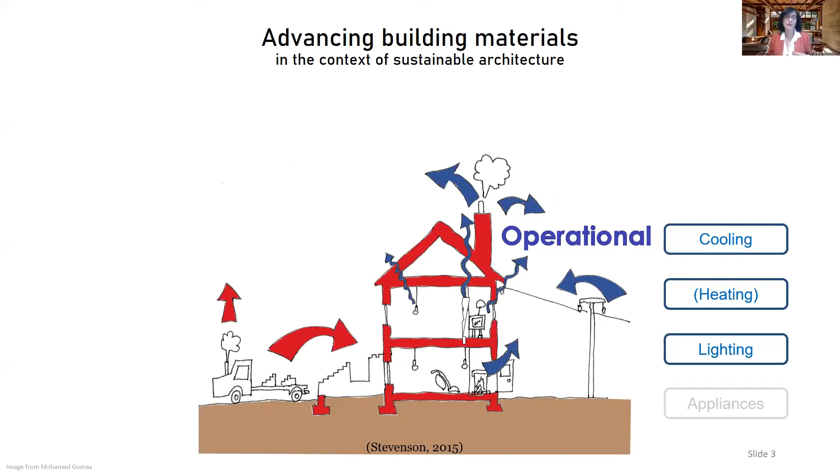However, we often forget that building materials also consume energy to make, construct, maintain, refurbish, or dispose of at the end of the building's lifetime. So this is something advancing building materials need to also consider—minimizing the operational energy at the same time as minimizing the embodied energy, in order to reduce environmental impact.

Now, the first part of my talk is about advanced building materials for building facades, in particular glass. Why glass or glazing? I think glass is like the face of most modern buildings—we love to use glass. Why? Because on one hand, the glass can protect us from the elements, from heat, from rain, and so on, but also allows us in the building to still enjoy the view outside.

First, glass has issues because it receives solar radiation from the outside, and some part of this solar radiation will be reflected, some will be immediately transmitted, and some will be absorbed—which then is either re-radiated to the inside or outside. The part radiated inside becomes long-wave radiation, meaning it changes property from short-wave to long-wave radiation, and it gets trapped in the building.

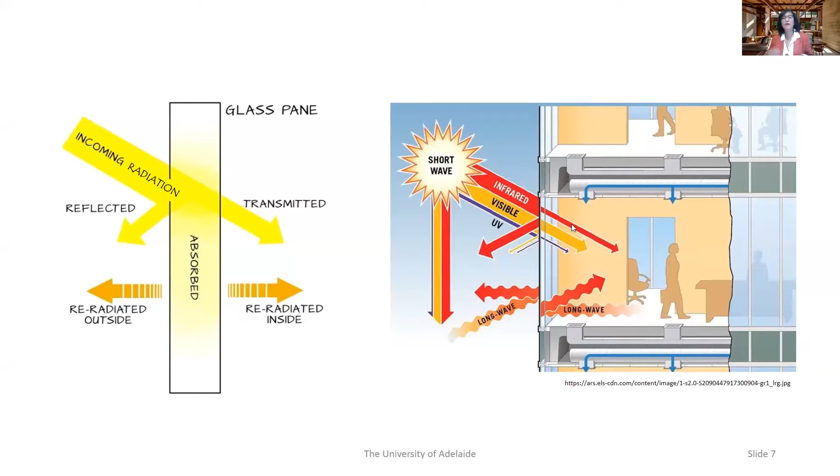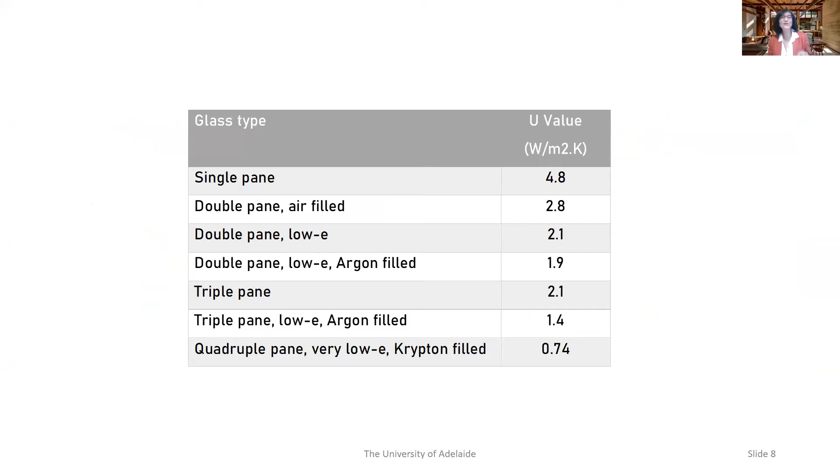So we could reduce the amount of heat coming into the building, and there are two properties we need to look at. One is called U value, or sometimes conductance—basically the rate of heat transferred through a material, in this case glass. Single pane clear glass could have a U value of about 4.8 watts per meter square degree Kelvin temperature difference between inside and outside. As you can see here, when you put in double glazing with argon-filled gas, or triple glazing and so on, the U value becomes less and less.

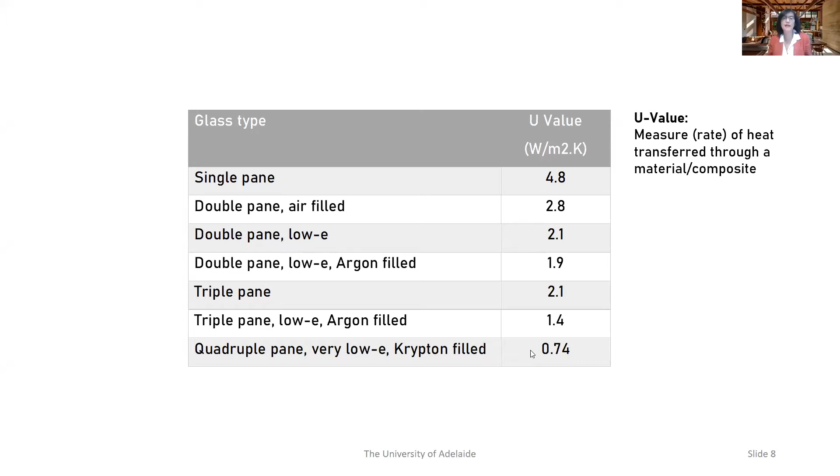The other property is what we call solar heat gain coefficient, which is basically the percentage of solar heat directly absorbed by or transmitted through glass. Again, the higher the solar heat gain coefficient, the more heat comes into the building; the lower it is, the less heat comes in. Now, the difference between the two is that this applies when you have direct solar radiation, whereas at nighttime, if the outside temperature is still higher than inside, the heat would still be conducted by the glass. So U value is conductance, and solar heat gain coefficient is the heat transmitted.

So what we want is minimizing the U value as much as possible, or as much as realistic, but also try to minimize solar heat gain coefficient.

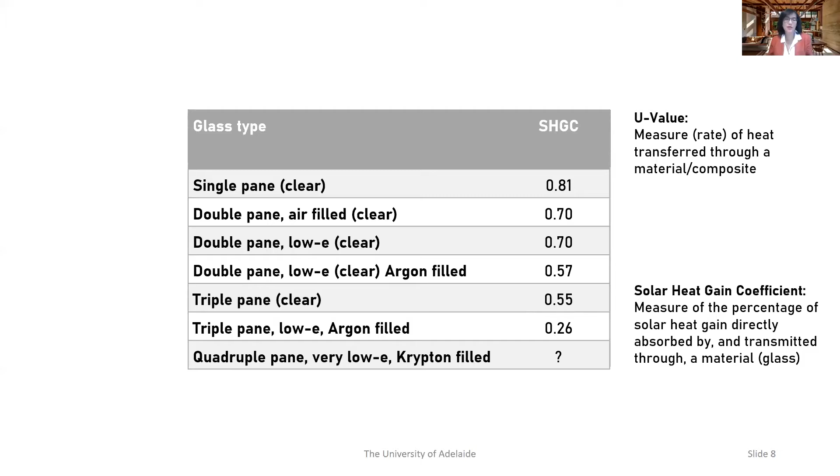Minimizing solar heat gain coefficient can also be done by just putting external shading. Whether it's a small house, we could have shading or trees in front of the building, or in a big building, you could have external shading, which in a way could also reflect the architecture of the building.

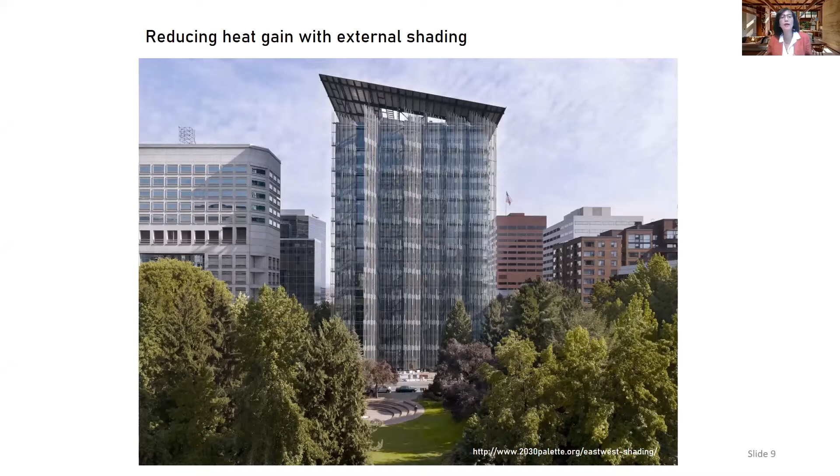This particular one has quite intricate external shading devices where it blocks the western sun, which is a bit warmer than the other side of the building. The northern and southern part of the building has some overhang and fins like this. So what's wrong with putting this onto the building?

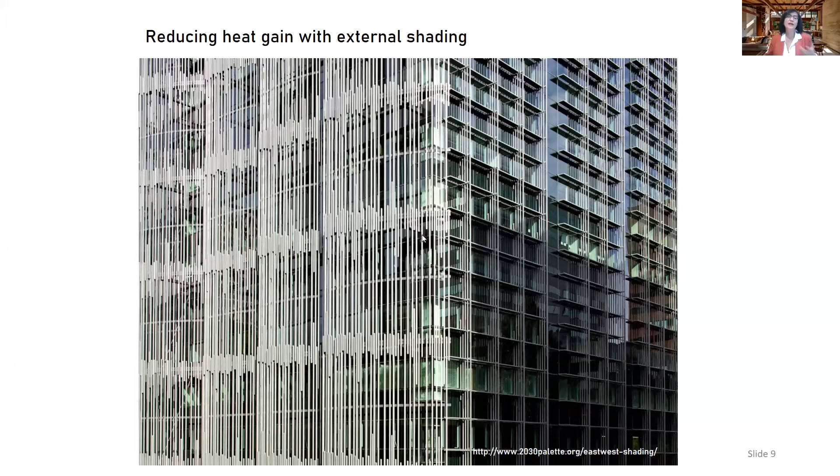There's nothing wrong, except that in a bigger building it could be quite difficult to maintain or keep clean. You can imagine if birds fly into it and leave droppings, these just get dirty very easily, and somebody has to clean it. You can imagine how difficult that is.

Another strategy is using what we call reflective glazing, and it can be quite efficient or effective to minimize the heat gain to the glass because it can reflect up to 90% of solar radiation.

I remember back in the early 80s, one of the first buildings in Jakarta that had reflective glazing, I think it was the Lippo building in Kuningan. I remember when I went to that building, I used to stand in front of it and I thought, wow, that's a mirror. So I could use it to brush my hair before I had a meeting inside the building.

Anyway, the problem with reflective glazing is that while it reduces the heat gain, it also reduces the solar radiation in terms of light, the visible transmission. As a result, the building can get darker inside and you have to turn on your electric lighting. So whilst you reduce the energy for cooling, now you use a lot of energy for electric lighting. So I don't think reflective glazing is quite smart.

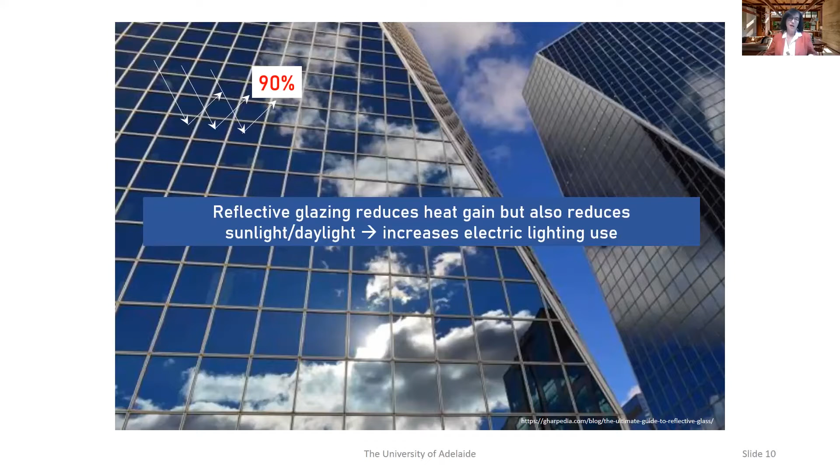In the past, I suppose at the end of the 20th century, there has been some new development called smart glazing, sometimes also called chromogenic glass. So what is it? This type of glass basically can switch the thermal and optical properties of the glass depending on the outside condition.

It's a glass that can switch its property using some sort of artificial device. It could be some sort of gas put between the panes of glass, or you could induce it with electricity using what we call the electrochromic technique. Basically, it then switches the thermal property of the glass, so it becomes darker when the sun hits it, and then it starts to behave almost like reflective glazing, reflecting the heat to the outside. Then when there's less heat from the outside, it starts to clear up again, allowing the sun to come into the building.

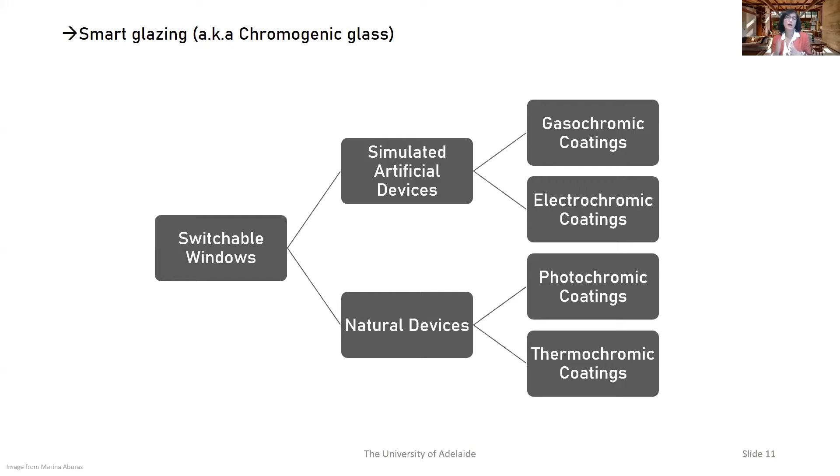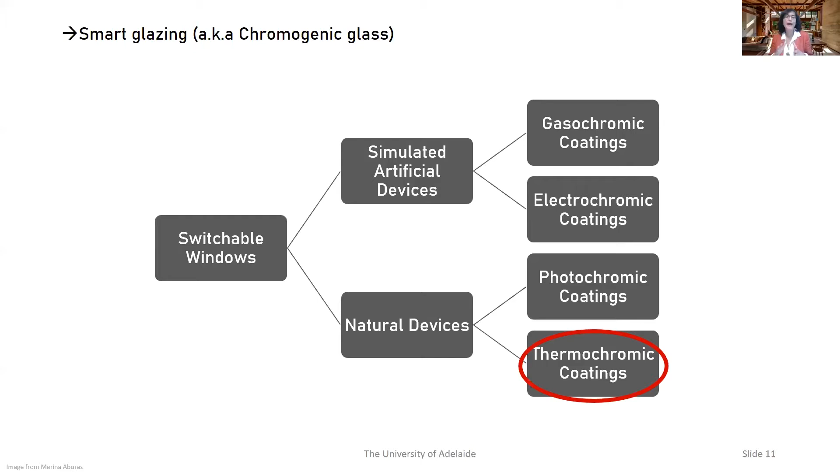The other one is the natural device - the kind of glazing that does something similar but without these external devices. One is called photochromic coating, which reacts based on the amount of light that goes to the glass. The second one is called thermochromic coating, which is what I'm going to talk about here. Basically, if there is a higher temperature outside, the glass becomes darker again, reducing the amount of heat that goes into the building. Then when it becomes cooler, it becomes lighter again, clearing up the coating's color and allowing the sun to come into the building.

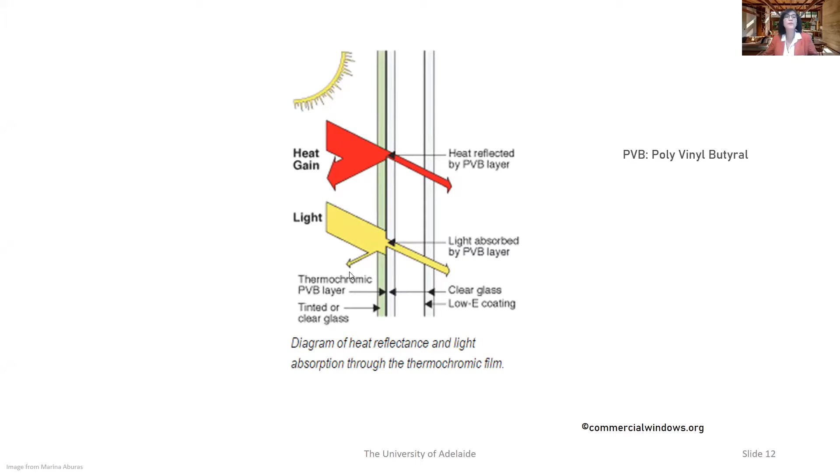So in a nutshell, the way it works is something like this. The sun would hit this glass, and with this PVB, or polyvinyl butyral, coating, it would reduce the amount of heat coming into the building while still allowing some light through, with only a little part reflected out. This is how it looks in the most conventional thermochromic coating, at what we call the 'on' stage, when it changes its property to become darker and reflects the radiation outward.

At the on stage, the problem with conventional thermochromic glazing is that it still reflects too much solar radiation, which also means it doesn't allow visible solar radiation coming through the glass, so the inside might still be darker. So thermochromic glazing now is the new reflective glass, although it doesn't happen all the time, but it seems to be the case.

Before I go to the actual work, I apologize that this probably seemed too technical for many architects, but it's a very important concept.

Basically, when the sun doesn't hit the glass, or when the outside is cooler than the inside, the glass is in what we call the off stage, or the cold stage, and it's in the semiconducting mode. Then when the sun hits it and it starts to switch the property, it becomes metallic, and that's where it reduces the sun coming into the building.

The change of temperature often in the conventional one happens at quite a high temperature. Actually, the transition temperature is about 68 degrees Celsius.

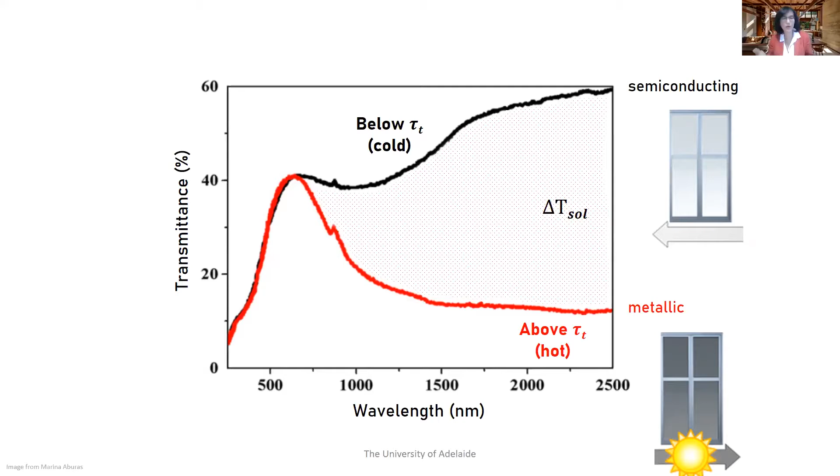If you can imagine, I'm sure some of you are wearing sunglasses or glasses that when you're outside, the glass becomes darker, and then when you go inside, it clears up this darkness. It's a similar concept, although that's more what we call photochromic glass, whereas this is the thermochromic glass. So it's not based on light, it's based on the heat received on the surface.

So this is the work by one of our new PhD graduates. She's now a doctorate, Marina Aburas. She did her PhD with us, also in conjunction with the Department of Architecture at University of Nottingham in the UK. So she received 2 degrees in this.

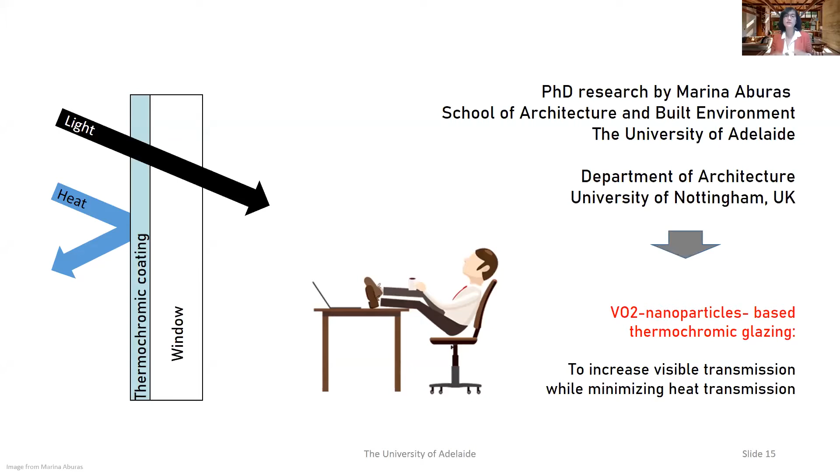What she developed basically is advancing this thermochromic glazing using vanadium dioxide nanoparticles. You probably heard nanoparticles - it's very minute, very small, 1 to the billionth of a meter. So it's a very minute particle that she applied on the coating for this thermochromic glazing, with the idea to increase the visible transmission of solar radiation while still minimizing the heat transmission.

She also tried to reduce that temperature from a high 68 degrees to 36 to 40 degrees. What it means is that the glass doesn't have to be so hot that it would change its property. It can change at 40 degrees, which means the glass doesn't get too hot, so there's less heat being generated or transmitted to the inside. So it tries to cool the building much quicker than conventional thermochromic glazing.

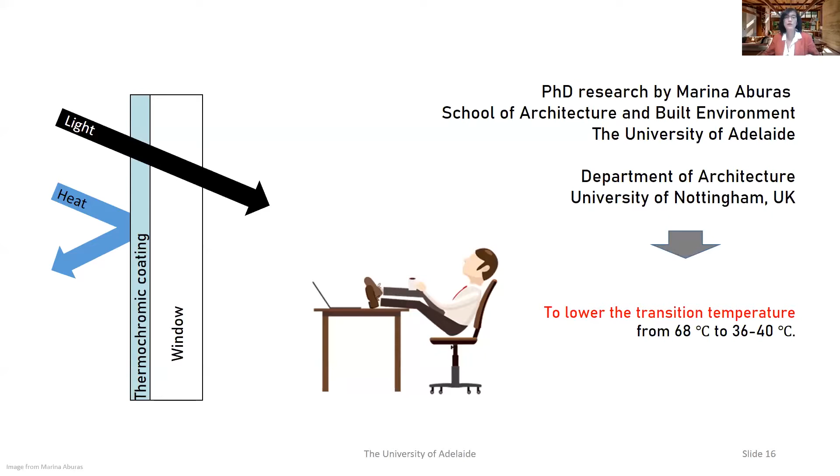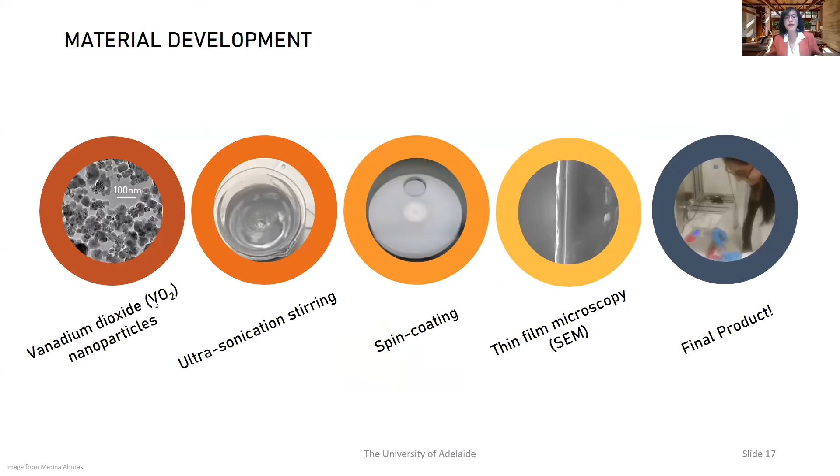Now, this is work of many years, 2 to 3 years, about 2.5 years. I'm not going to show you in detail, but basically she developed these vanadium dioxide nanoparticles using ultrasonication stirring, then spin coated, applying thin film microscopy, so it becomes a thin film, and then the final product. For the final product, she also applied several layers, from 80 nanometers to 800 nanometers - the more layers, of course, the darker, the less layer the less.

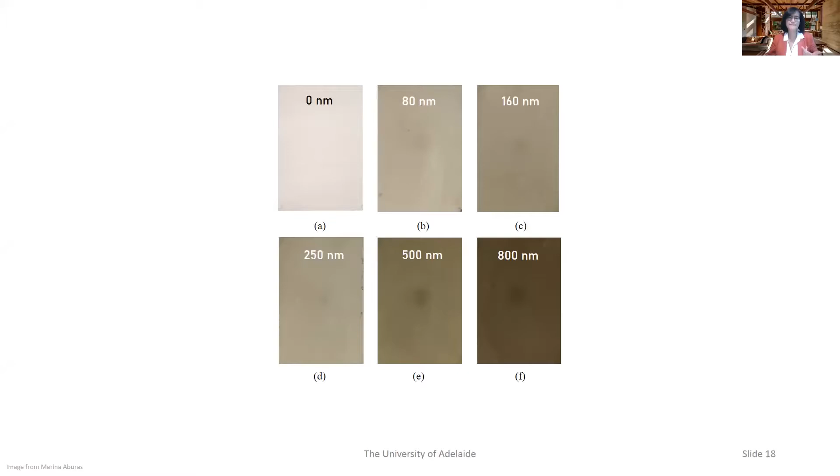Now, this is the exciting thing. If you remember the graph I showed you before, the conventional thermochromic glazing, when it's at the on stage, have a look at this - the percentage of solar radiation that comes into the building is only about 17% at the on stage, which means you reduce so much light into the building.

This is what she was able to develop: with an 80 nanometer glass at the off stage, let's say you got about 80% solar transmission. When it's at the on stage, it is reduced by 10%. Let me jump to the 500 nanometer - it reduces to 60% transmission, which is still a lot of light. And even the thickest one, she could only reduce the solar radiation to 30%. So you still get light coming into the building.

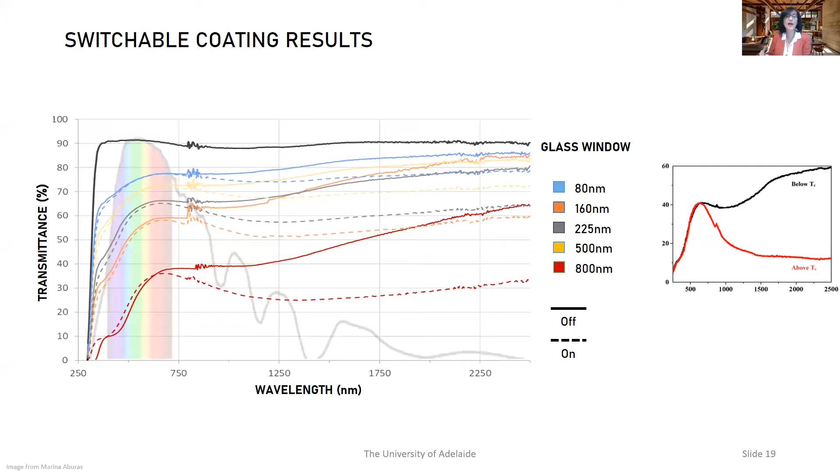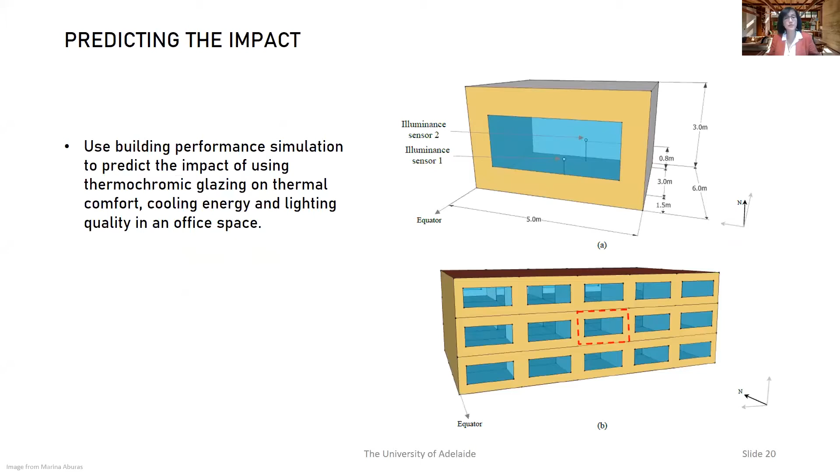So what she then did is apply this glazing to a hypothetical building, an office building, kind of typical office building, and use building performance simulation to see the impact of this glazing. I'm just going to ask you to focus on the hot climate, which is the building in Cairo, hypothetically in Cairo. Of course, Cairo is not exactly the same as Jakarta, but it is hot - hot and dry, not hot and humid.

But have a look at the impact of applying that coating. If I just jump again to the 500 nanometer, basically you could reduce the energy by 25%.

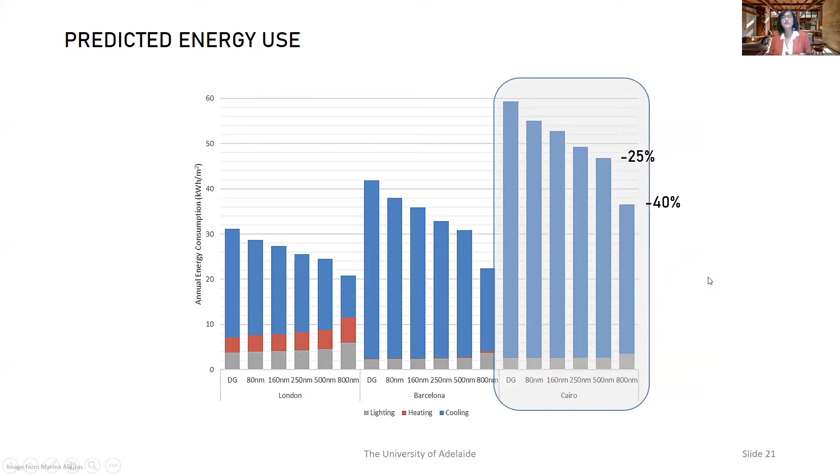And if you use the thickest one, you could reduce by 40%, so nearly half of the energy used for cooling can be minimized. The lighting energy does increase slightly because the building gets slightly darker than before, but the increase in lighting energy is almost negligible compared to the significant decrease in cooling energy. So it's possible to achieve this using this new nanoparticle thermochromic technology.

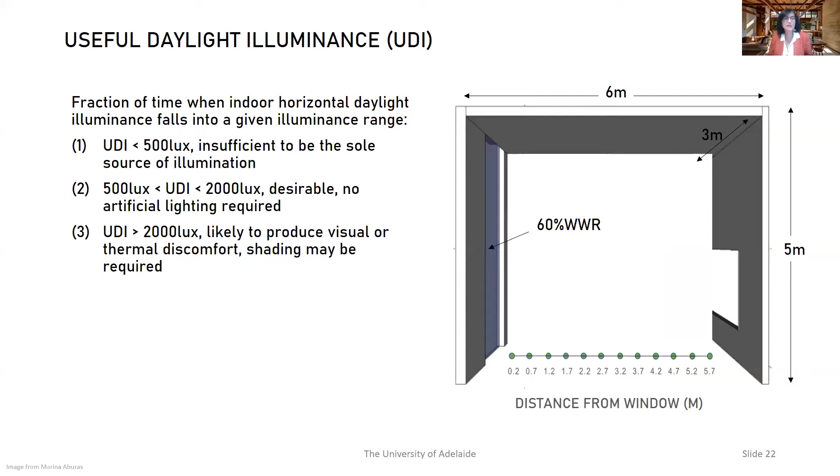In addition, she also looked at how useful the daylight is that gets into the building. The target is, if possible, to achieve between 500 lux to 2000 lux of what we call useful daylight illuminance, although 500 lux itself is still quite high. In most green buildings now, 300 lux is considered sufficient. And this is what she found.

If you just look at double glazed windows, you got a lot of daylight, obviously, but at the same time you got excessive amount of daylight, even up to 5 meters from the window. So this is the distance from the window.

With the thermochromic glazing, even with the thickest one, you still have quite a lot of useful daylight coming into the building. Yes, there's a lot more that is less than 500 lux, but as I mentioned, in new green buildings, we don't need to have this 500 lux. 300 lux is already sufficient.

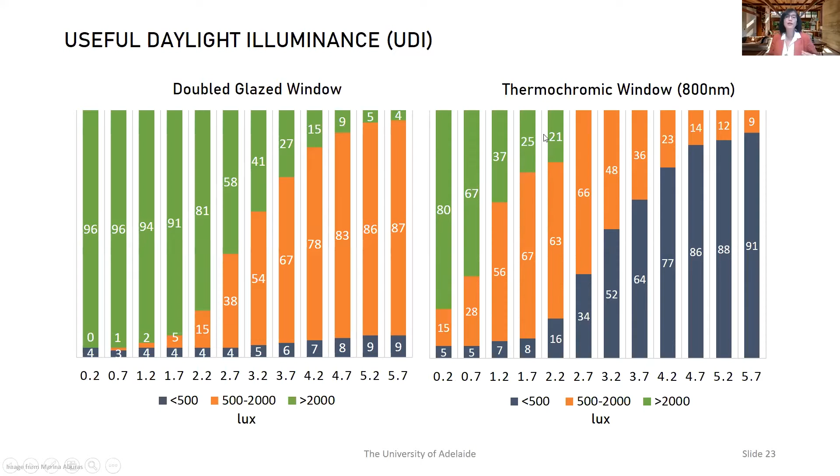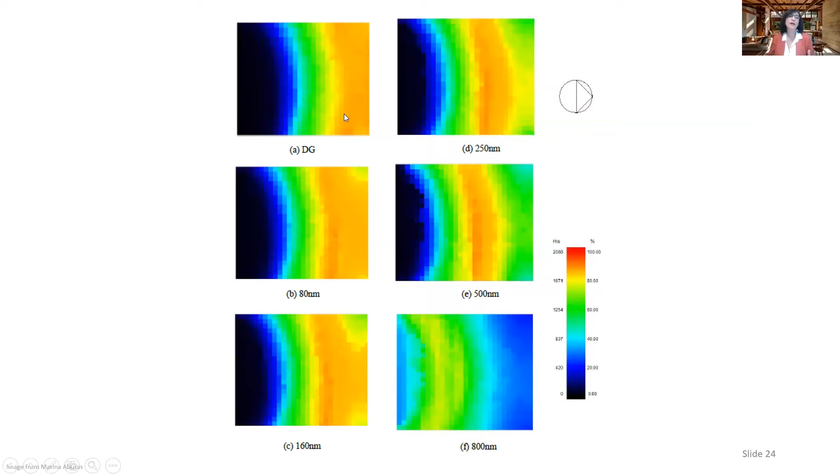And with it, it also reduces the possibility of people experiencing glare, because you don't have excessive amount of light. So the daylight is a bit more evenly distributed when you use the thermochromic glazing, compared to double glazing, where you got really bright area in the front and then quite dark at the back.

So where's it going to be in terms of this invention? Of course, she only just finished the PhD, so hopefully a manufacturer might pick up on this idea and could start manufacturing at a larger scale. So that's the first part.

And how do I go with time? Am I still okay? Okay.

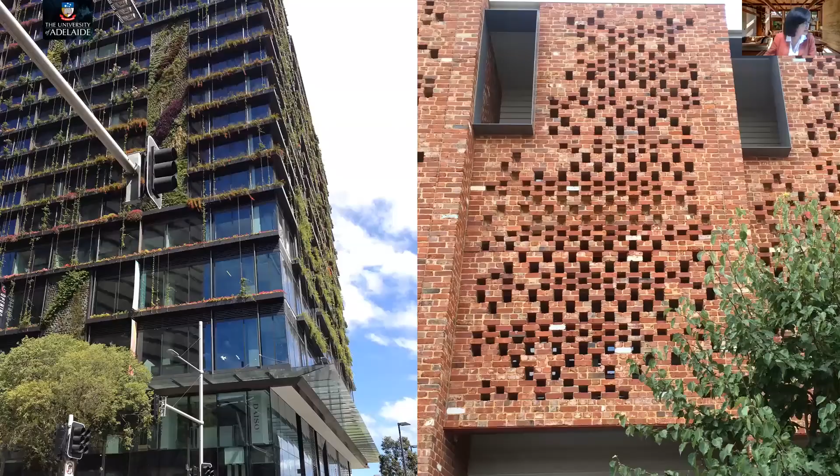So the second part is quite the opposite. Whilst the first one is looking at the glazing, the second part of the presentation is looking at the wall itself, and it's quite the opposite in terms of the materials. This one is looking at, well, I shouldn't say low cost, but it's basically using vernacular material.

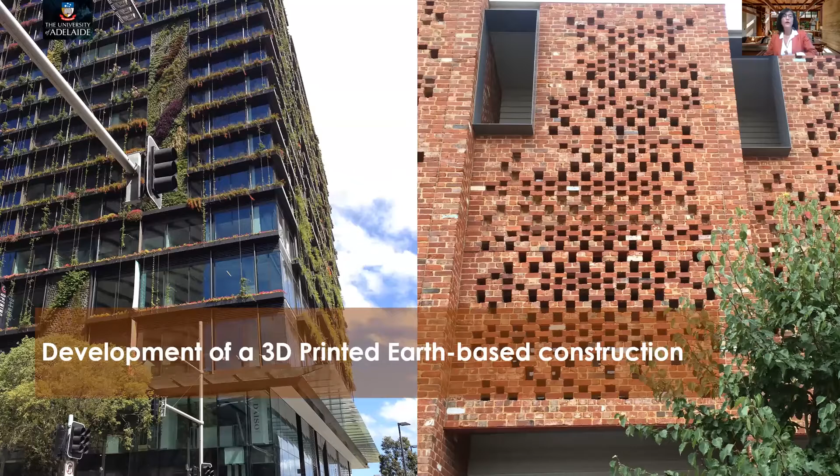However, with a high-tech way of constructing it. So it is about development of earth-based construction using 3D printing technology.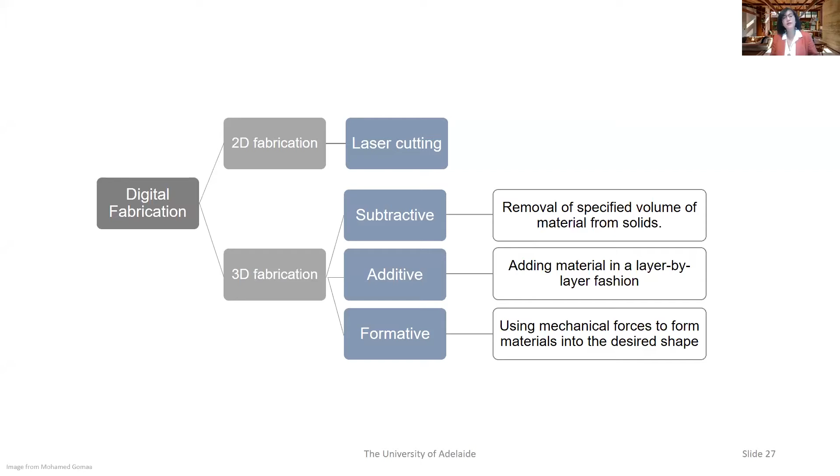Now, I'm sure many of you, if not most of you, are quite familiar with what we call digital fabrication. So digital fabrication basically could be a 2D fabrication, just using laser cut, and I'm sure many of you build physical models now using laser cutters. Or you could use 3D fabrication. With 3D fabrication, you either use it as a subtractive or removal method, so let's say you got a block of material and then you start cutting it and you make the model.

Or you could have the additive method, where you add layer by layer of materials, again to make a model. Or with the formative method, you form any kind of shape you want. Whereas on top of this is the 2D laser cutting.

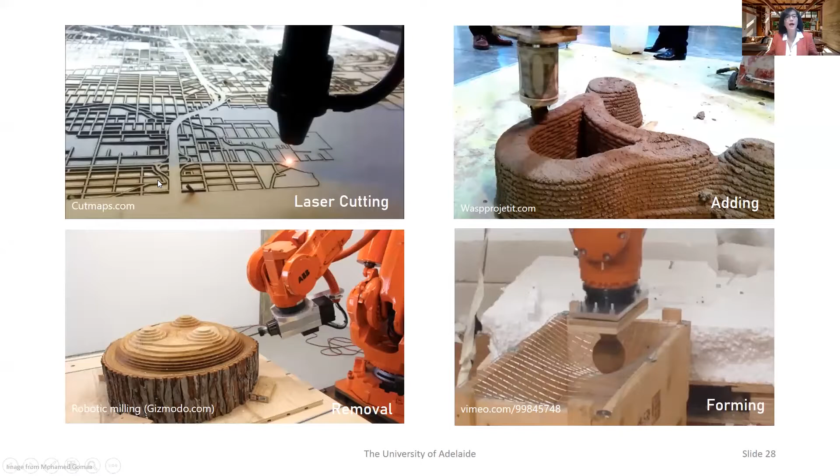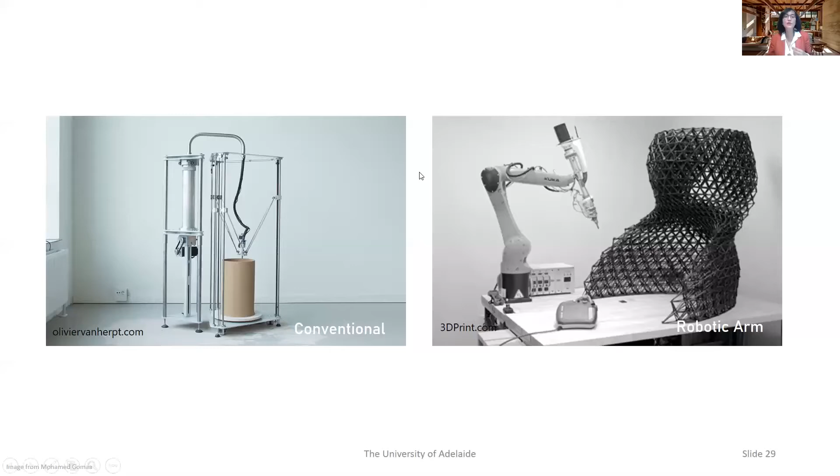Also, a lot of 3D printers, or the conventional one, has 2 axes, so X and Y, so you only print in the 2D XY direction, whereas a robotic printer you can print with the 3-dimensional or 3-axial direction, so X, Y, and Z basically. What my PhD candidate has been doing is basically using this robotic arm printing.

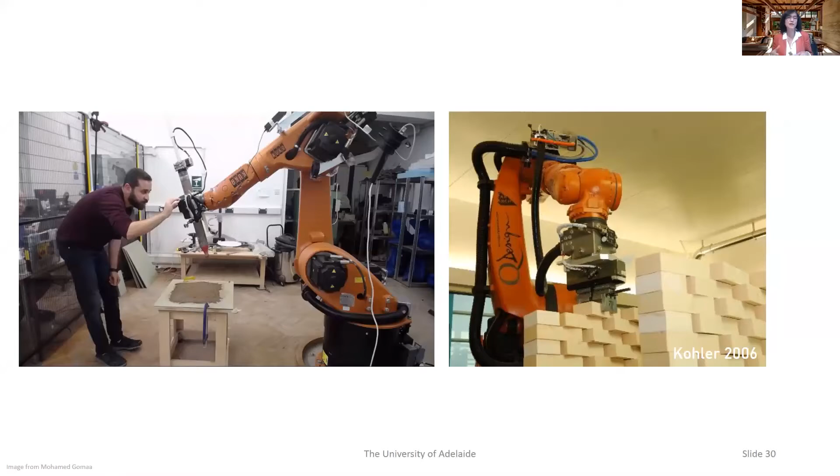But not just to build a model, but to build the actual building using this digital fabrication technology. So it's basically building a wall, a real wall, using a 3D printer. So this is what I'm going to talk about.

And why do we use 3D printing? When he actually brought this idea to me, I was quite skeptical. And I said, what's wrong with building with people? And why can't we just build with a crane or with normal construction techniques?

Well, he was able to convince me, basically, that when you use 3D printing or a 3D printer to build a building, you potentially reduce the construction waste. Because, as you know, those of you who do 3D modeling using a printer, you have to program the printer, which means you can program it so it will only use material as you need. There's not going to be much waste.

Whereas if you build with the conventional way, let's just say, because building material comes at certain sizes—let's say a timber beam is 4 meters long, and we want to build something which is 3.5 meters long, what do we do? We have to cut it, right?

Now, what happened with the 0.5 meter leftover? Hopefully you can recycle it or use it for something else. But my experience is a lot of construction sites end up with these leftover materials. Why? Because either the material is longer than what we want, or we don't design and build based on the available size of material. So we change the size because we think, well, we can cut it anyway. But what happens now is we start having a lot of construction waste.

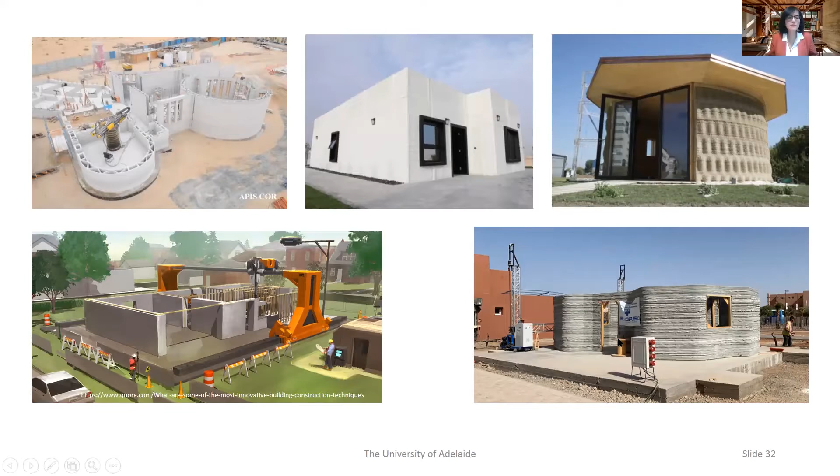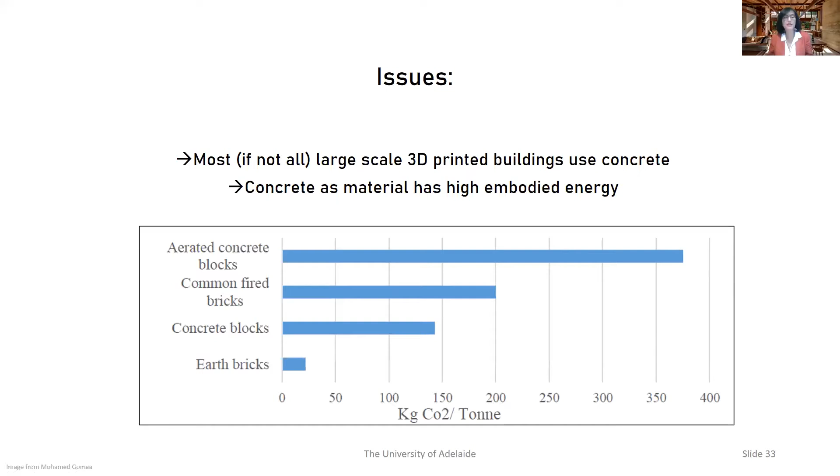The issue, or the argument here, is that most, if not all, large-scale 3D printed buildings at the moment use concrete. Concrete as a material has high embodied energy. So if you look at this chart here, concrete, particularly aerated concrete, has quite high embodied energy compared to even concrete blocks. But if you use earth materials, you immediately reduce the embodied energy quite significantly.

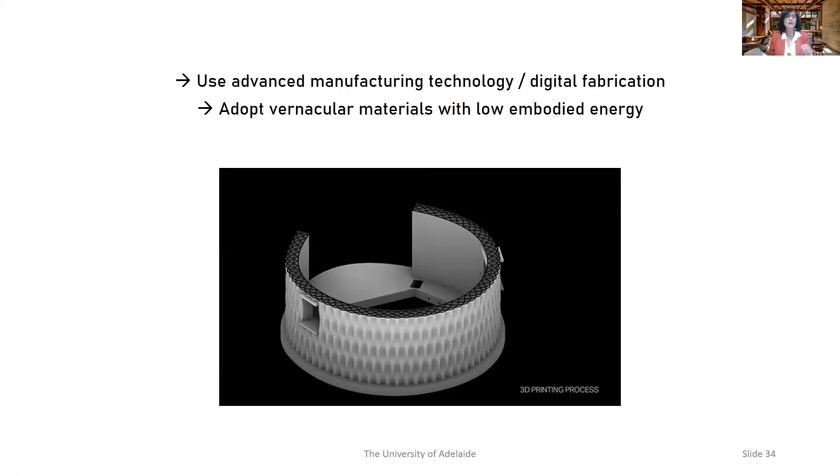So what he tried to argue is that we can use this advanced manufacturing technology, but let's adopt vernacular materials that have low embodied energy, materials that we see every day, just local soil. This material, some of you must have known, is called cob. It's not corn on the cob, so it's not corn, but the name is actually cob. It's basically made of earth or subsoil mixed with water and with fiber to bind it.

It's usually straw. I think, okay, we call it jerami in Indonesia. So that's a very traditional material. And sometimes you can add sand or clay, it's optional. Now you might say, that's a bit kampungan, isn't it? Why would you build using this dirt? Yeah, it doesn't look nice.

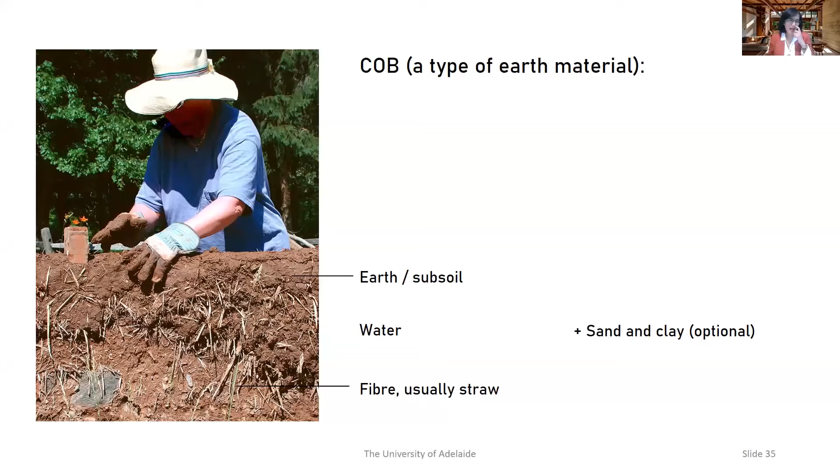All right, so what did he do? Now, because concrete is more liquidy, it can print very quickly or easily, whereas with cob, as you can see, when you build it by hand it's easy to mold, but when you put it in the nozzle of the printer, it's harder. So the first thing he did was try to find the most suitable mix for the printer.

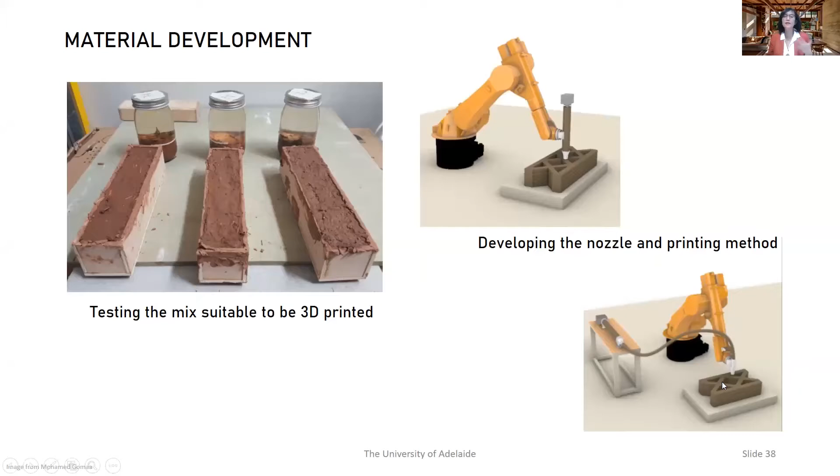And then he also looked at different types of patterns for the wall materials, and this is him in action. So again, several patterns of the 3D printed cob. Interestingly, this technique can also be used to print a wall that is not just vertical, even on a curve, on a tilting angle, and so on, it could also work.

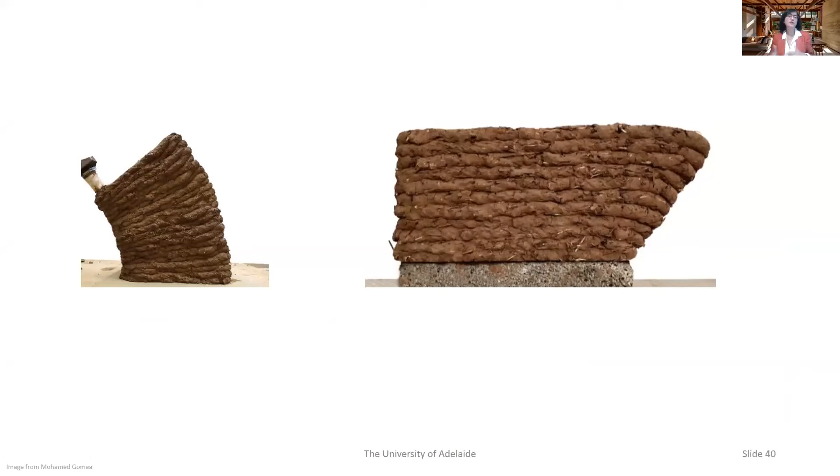His idea, in a nutshell, is that we could also deploy this technique for building in space. So let's say we want to build a shelter, I don't know, on the moon one day, or on Mars. All you need to bring is the robotic arm and another robot that would move this robotic arm and use local materials to build the structure. Of course, the question is, where's the water coming from?

Say on the moon, you don't have much water, but there's some part of the moon that might be ice, and the ice can be melted with solar panels, and then you can use that melted water to create the mix. We haven't experimented with this, obviously, but the idea is there.

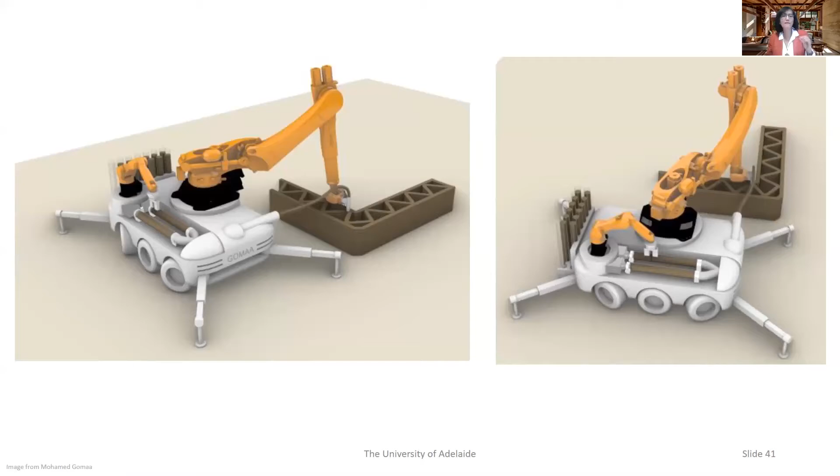So what he did was not just experiment with the shape, but also with structures, to look at the structural capability of this, and found that 3D cob walls can sustain structural adequacy with less material because you don't need to print solid material. You actually reduce the amount of materials, and this pattern actually provides the structural strength of the wall, and it can even be used for two-story buildings.

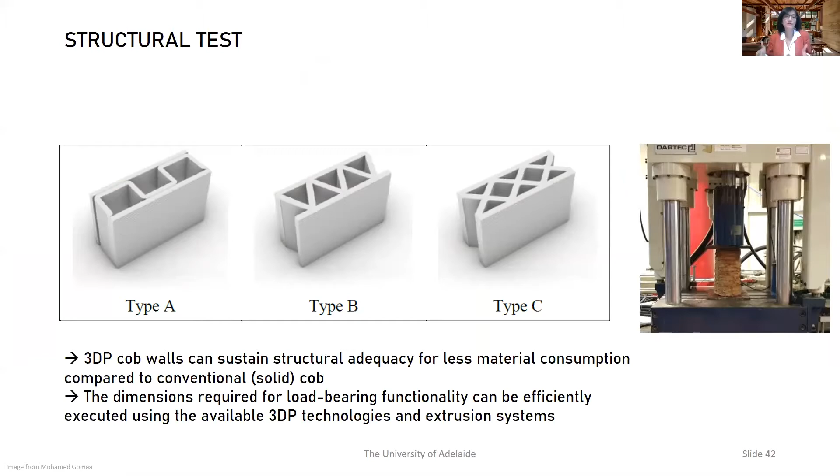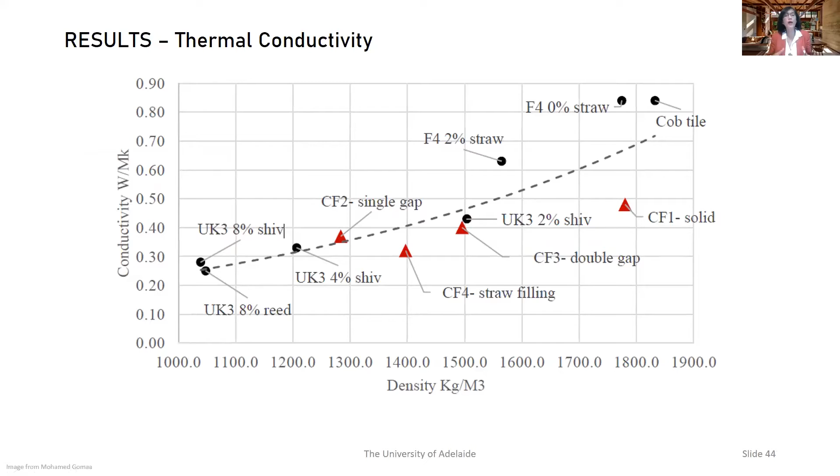He also looked at the thermal conductivity, because we also want to see how it performs in terms of minimizing cooling energy into the building, and found that the 3D printed cob, because of this air gap, actually reduces the conductance compared to a solid wall. So it is a promising material that can be used for building walls.

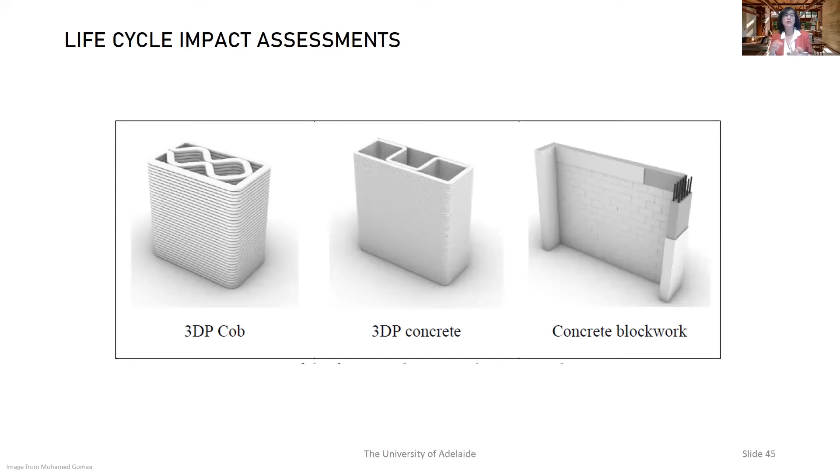It is true in terms of mineral resource scarcity and land use, it would use more than concrete because you use the soil - there's minerals inside the soil - but it uses much less water. It would potentially reduce ozone depletion and significantly reduce the global warming potential.

So, in summary, the message I'd like to share is that as architects, let's try to explore new materials, not just based on aesthetics, but also based on their impacts, whether on comfort, cooling, or lighting. As much as possible, try to minimize the embodied energy of the material. Also, if possible, implement efficient construction techniques so we minimize construction waste, and hopefully help minimize environmental impacts from building materials or construction techniques.

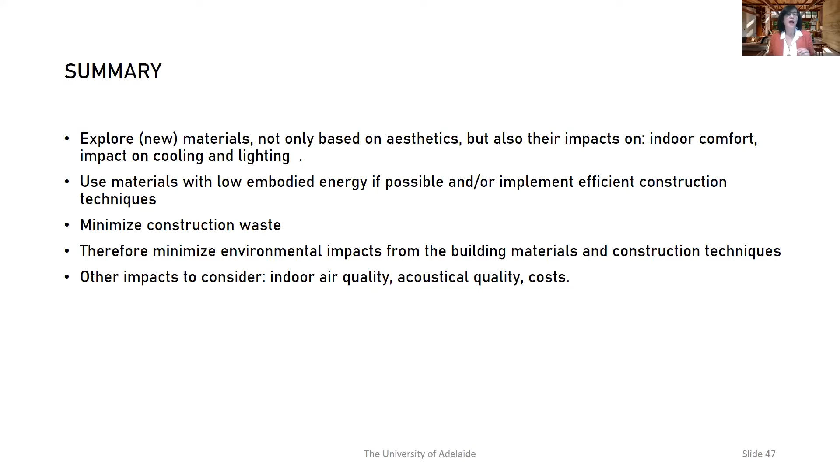If you want to know more details about the work, I will share this PowerPoint with the organizer. So those are two papers - the first student, Marina Aburas, did the ones about thermochromic glazing, and then the last papers on the 3D printed cob were done by Mohammed.

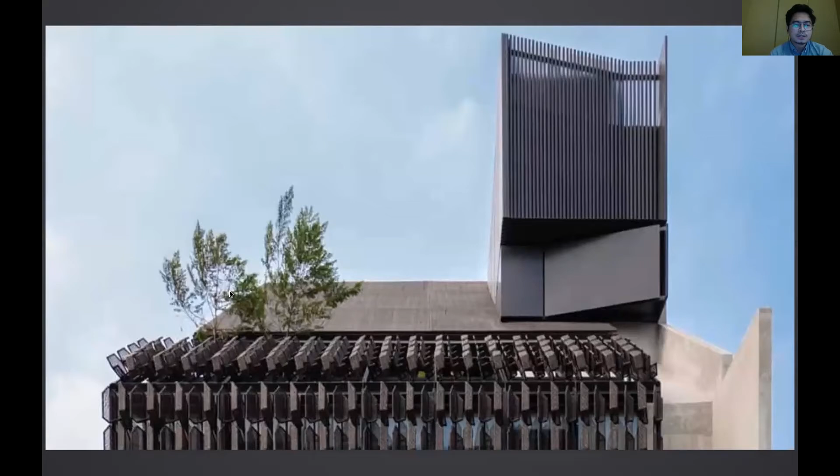This is an example of a project done by Atelier Riri. As you can see, the facade of the building is made from Byo Living woven material. It can still block the sun's rays from different angles. It's obvious from the design—it has a 3D structure on the facade, so it can block sun rays from different angles, from the top, and from the left or right side, while still maintaining good air circulation inside the building.

So this is one example of our project. Another solution is to solve scalability problems in craftsmanship, especially because craftsmanship is all about handmade work and takes longer than industrial production. So we're trying to solve the scalability issues.

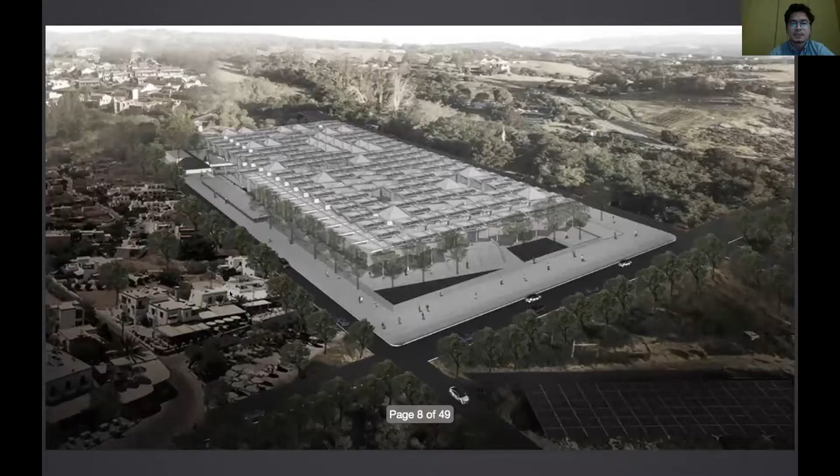Here's an example: this is one of our projects in Tubaba, one of the youngest provinces in Sumatra. We solved the scalability problem by engaging local people to get involved in the project. We empowered them to create something they can be proud of when their work is displayed as a landmark of their town. With our technique, we transferred our knowledge to the local people to create on a much bigger scale, applying it to buildings and architecture.

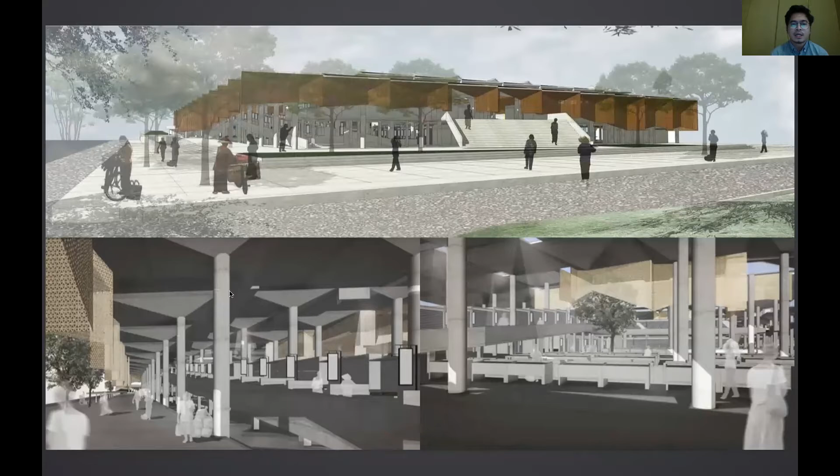And this is from another side. As you can see, it has a large hanging screen. The scale is very large, and it can empower many local people to work on it.

We also developed an interior system solution here. For example, this is a 7,000 square meter eco ventilation system we built for Toyota headquarters. We worked together with Arup and Meinhardt for indoor airflow distribution, while decoding Indonesia's 16,000 islands weaving technique over 2 years. We did a lot of research for the pattern we used for this project, and it took 2 years to decode the patterns and apply them to this project.

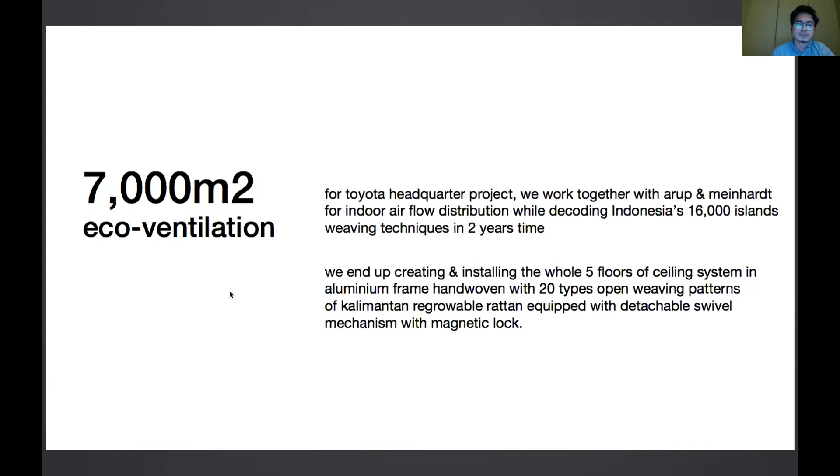So here's the example: we created a system to replace conventional air ducting. As you can see, there's no ducting installation in the ceiling. The design allows air to stream throughout the space equally, so it doesn't have conventional ducting to flow cool air equally across the whole space.

And this is the result of the pattern that we select from the 16,000 patterns, Indonesian patterns from 16,000 islands. So this is one example of the pattern applied in the ceiling, for screens, and for wall decoration.

We also tried to solve the problem in mid-rise buildings, so we developed a lightweight facade. This is an example from our client. They requested a special customized facade design to be attractive from far away, yet beautiful from the interior point of view. So it has two faces, one facing outside and one facing inside from the interior.

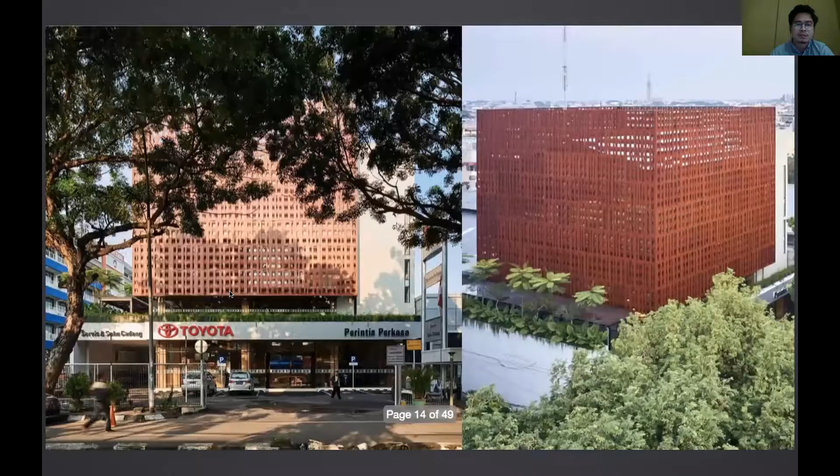So we propose a rustic metal color, just like hand woven, with somewhat randomized pattern. So this is the result. As you can see, we are mimicking corten steel. So it's very catchy from the outside.

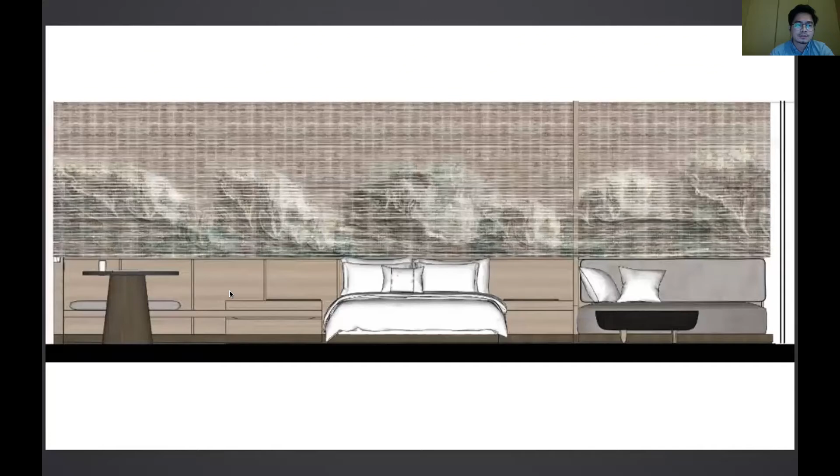And next is our digitalization. So we use graphical computerization to decode complicated graphics. This is one example from our project at Okinawa Hotel. We use the latest technology to decode the image into a weaving pattern like this. With the pixelation method, we can translate complicated graphics or patterns to the master weaver, so the master weaver can easily read or communicate the design to apply to the weaving.

This is also the result. It has the same material, but we play with the texture of the image. So it actually has a graphic, but it depends on the angle you look from.

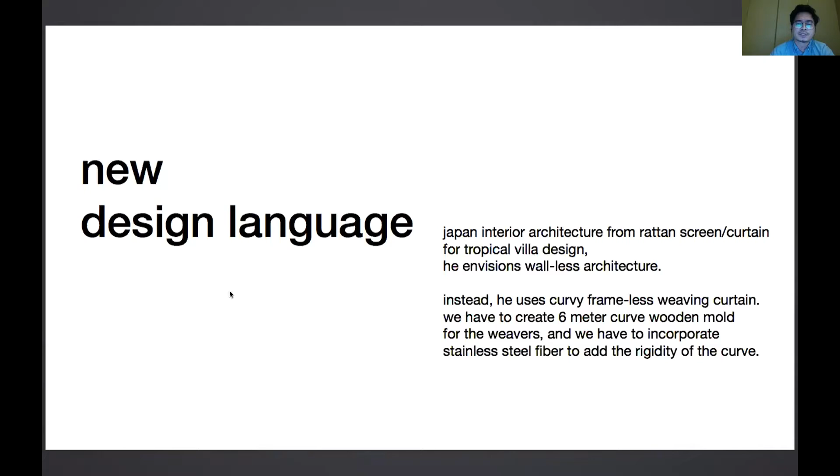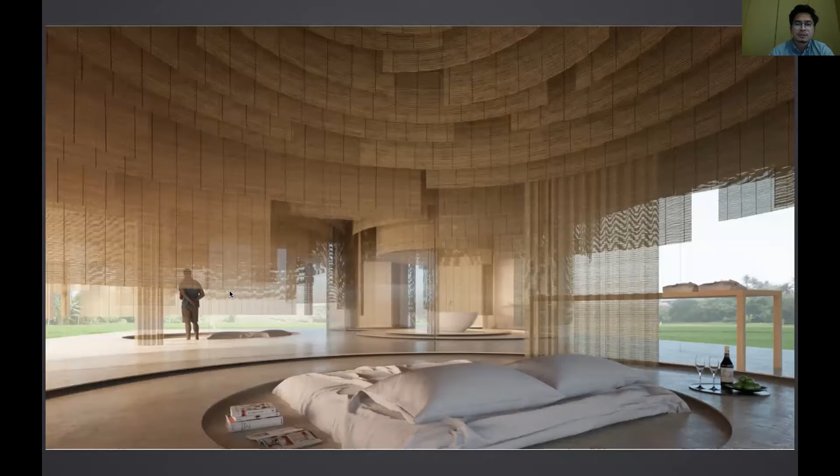We also developed a new design language for a Japan architecture firm. This is one of the most challenging projects we've done so far. This is the building using a screen or woven screen as a wall. We developed it over almost 3 years, I think. This is from the interior views. It has so many screens that can be a wall.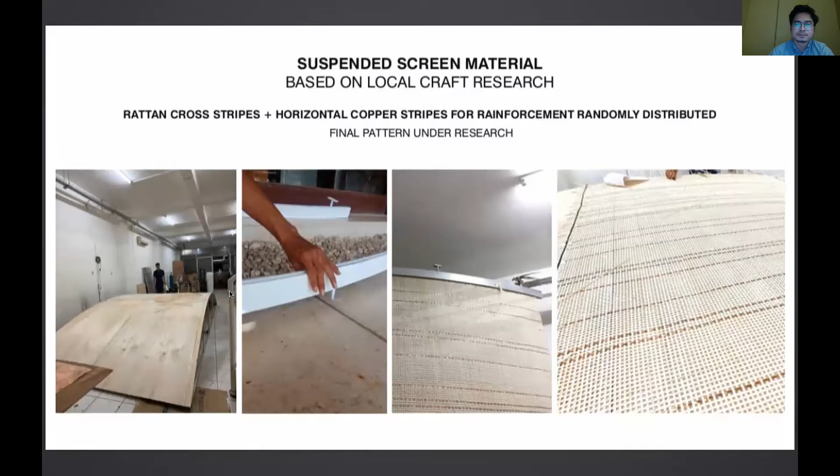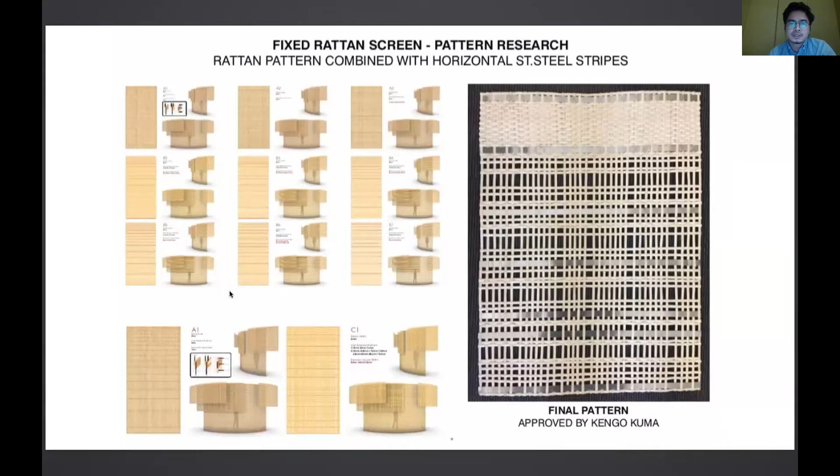This is what we've done, our R&D process with the screen. It has a special joint, and we also made a special railing system to make it moving. We also tested the weaving, combining natural rattan material and metal plate to get a structural feel, making the screen robust but also aesthetic in design.

And this is the first mock-up. It's still in progress, so I can share the final or completed project later.

Going to the next slide, we also developed a new rigid weaving combined with metal weaving. Here is one example. We did it for the pre-hall exhibition of Andra Matin last year. We developed a screen made of woven metal combined with natural rattan to create a light but also robust structure. These are the details we've done, combining metal weaving with natural rattan weaving. And here is the result.

We also did some artwork projects like this. This is our project for Hermès. We were commissioned to create a retail space weaving installation inspired by dreams. So we created an optical illusion effect with natural rattan material, using an approach of creating a thousand mesh lines to visualize the space between illusion and reality. Through our artisan spirit, we wanted to capture the essence of timeless luxury by creating perfect weaving lines through careful selection of high quality rattan material, new knotting craftsmanship, and rigid poles with careful linear rattan arrangement.

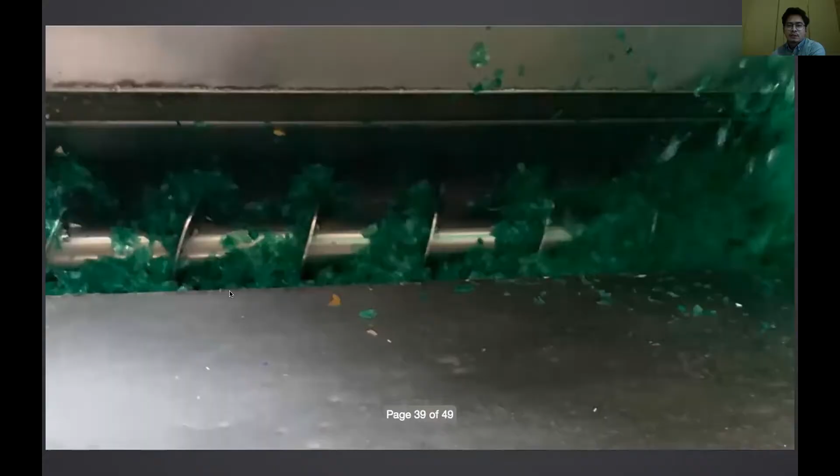And now we are developing material from waste as well. Since 2 years ago, we've been developing weaving materials from plastic bottle waste, working together with Rem Koolhaas and the OMA team. We created a one-of-a-kind translucent weaving ceiling system, which also works as an architectural lighting solution, arranged by Takeo Sugamata. This is the process: we've recycled around 6 tons of plastic bottles. We use green plastic bottles to make straps, then weave them to apply at the ceiling of the new Potato Head Hotel. And here is another application of the recycled material, used for furniture as well.

And we also use recycling material for screens at the restaurant. From there, now we are expanding our development to find more material which is based on waste material.

Looking at so much plastic waste problem, we created our own in-house initiative to develop new building materials which are elegant, durable, and extraordinary, made from different sorts of plastic waste. This is one example of the process, and we created hotel signage, also from the Potato Head project.

Tanaman - this is our latest development. The plastic waste can also be applied in furnitures and panels. The right hand side is industrial waste from a packaging factory - it's polypropylene and high impact polystyrene plastic. It is translucent, sort of like an acrylic material. So we try recycling it and applying it as panels for glass or for partitions.

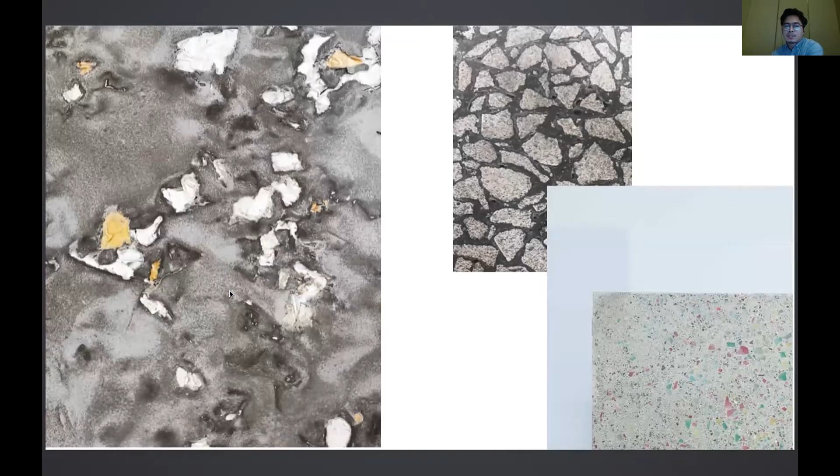The right hand side is actually charcoal - it is waste from the wood industry or furniture industry. Sometimes the wood ends up in the trash and they burn it. So we try to explore the material to become something that is aesthetic but also has a function, like an air filter or something made from charcoal. This is another exploration that we did.

I think that's all that I can share to you guys. Thank you for your attention, and if you have any questions and want to know further, you can chat or ask after this session. Thank you very much.

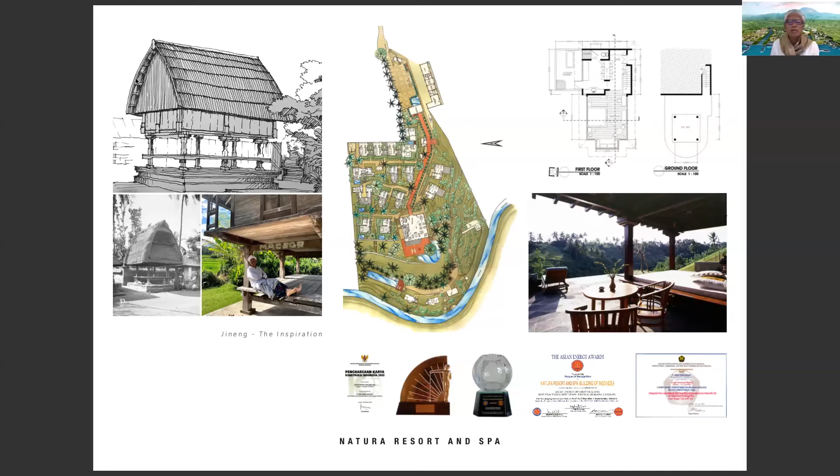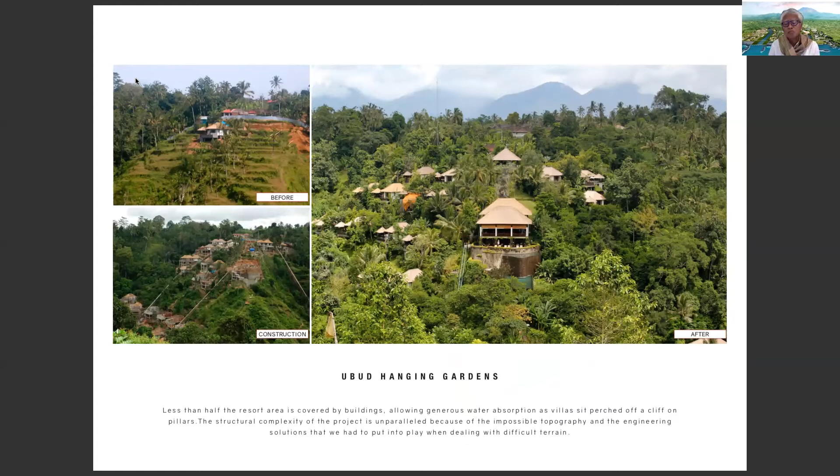I was really scared when we did this project, because we transformed one very steep hilly site to become a resort. We also put some hard materials, concrete, on it, but luckily we managed it well, and we can see the result. The condition of the site is much better after we built the resort compared to before, with some additional economic value in it.

So we can also transform the original idea of Balinese natural landscape to become a resort setting. Even for this one, this is a modern outdoor inclinator, but we clad it with bamboo to make it look more organic and more suitable to the setting of the site.

For this resort, because the site is very steep, we tried to make the building as light as possible. We found this inspiration from the traditional architecture in one remote village, and we wove the bamboo and transformed it into a thin clad bamboo wall panel for the villas. We implemented this in the 25 villas of this resort.

This is our design studio. I'm currently sitting in this room, and in this building we put mostly recycled materials. All of the wood here is recycled, and I'm happy to know where it came from, what it was before. Somehow it also creates more storytelling about the design elements in our project.

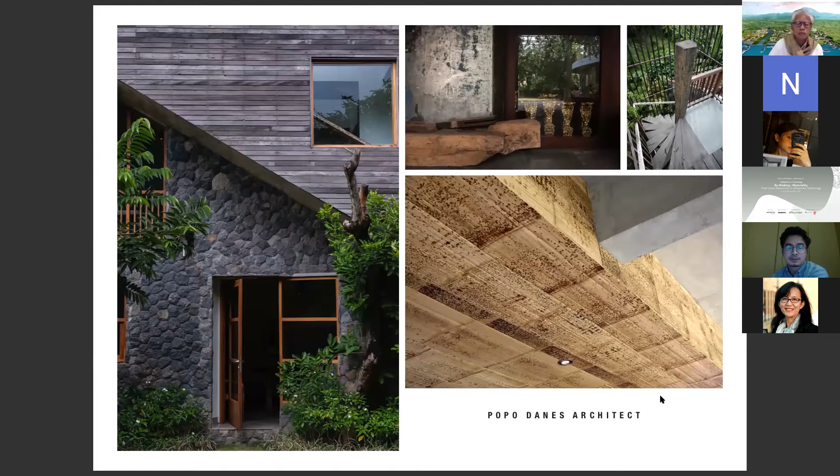In another case, we transformed an old set joglo from a poor village into a new, fresh structure in a glamorous setting, you could say, like the joglo structure in Java, mostly located in the village. But I appreciate the material - the joglo in Java always comes from very beautiful and precious thick wood. We can give it a new setting and new energy, and it becomes a new fresh building, and it can even become a luxury resort, as we did here in the southern part of Ubud.

This was an old granary. We transformed it to become guest bungalows. Every material is recycled from the old materials, and here we also use bamboo shingle, which is very sustainable as a renewable material. This is becoming one of the essential elements of our pride working as an architect.

Once we talk about sustainability, we can also move to other aspects of sustainability, like this project, which is about energy. I could consider this project the first one on an off-grid base.

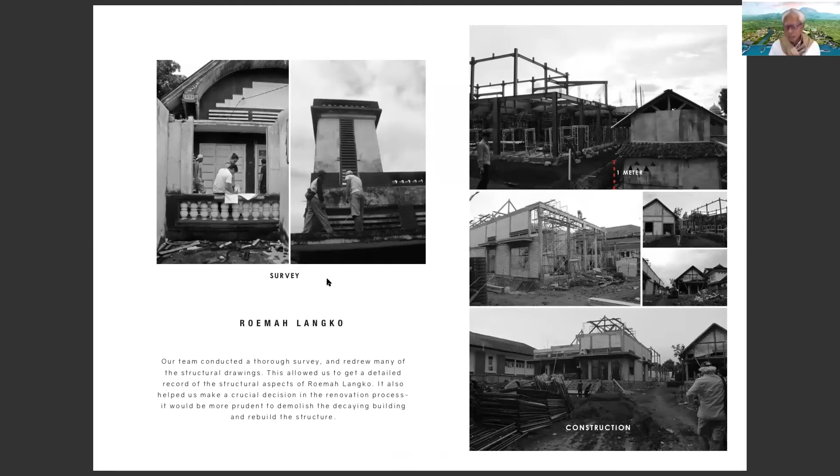And luckily we found all of the sources to find the old material, like the stained glass we can copy. We found some of the leftover stained glass, and we copied them in Surabaya, and brought them back as the facade of the restaurant in the front doors. And we also found the same kind of roof tile, the clay tiles, in Bandung.

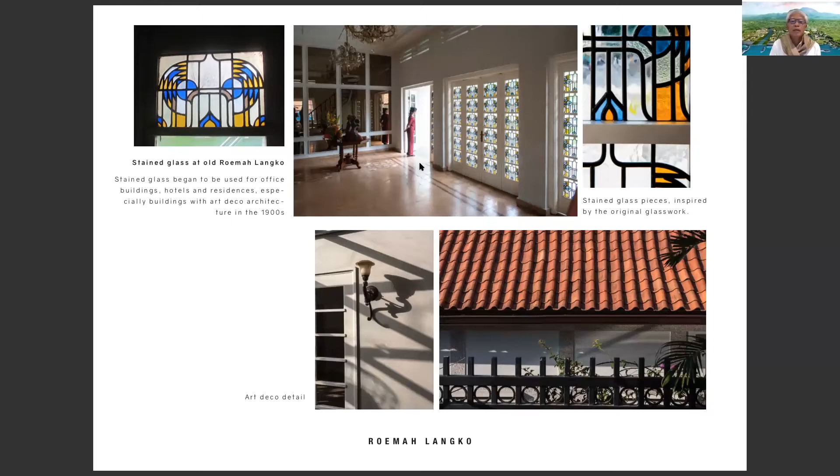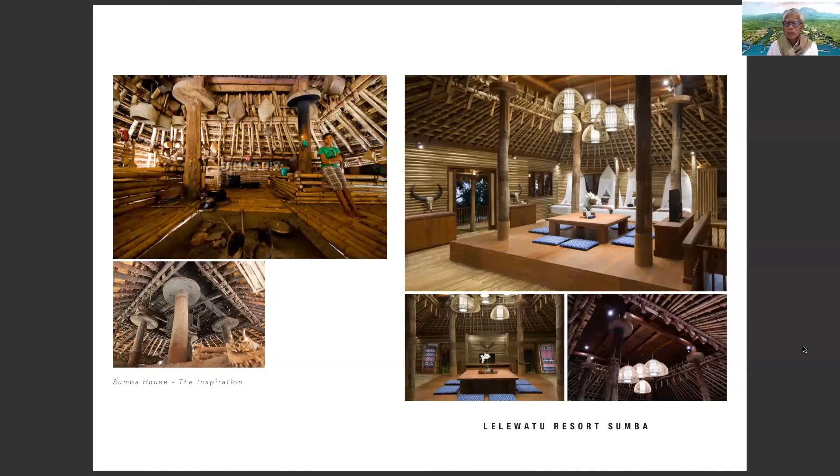So we also use even soft craft like the textile to become the screening and also create the shadow. We do it on several different levels, where we can do it in the raw shape, and also some of them in the fine finished product we use. I think this is some example of the way we are playing with this material, and also how we introduce the richness of our art and culture to the audience.

And we are glad because, for instance, the material of this presentation is mostly work which was done locally, either in Bali or some other island in Indonesia. But through the formula we created in Bali, the way we can collaborate all of this component, we now also got a lot of opportunity to implement the same kind of formula in other countries where we have a similar kind of ingredients, components of material and craft, such as in India, and also currently we are quite busy in the Philippines.

So I think that is the material I can share. I hope we can be more active later on for the question and answer. I really hope personally that this kind of system also can be applied in some other parts of Indonesia. I'm looking forward to some other opportunity in the near future to share some more projects. So I think I'm already using most of my time, and thank you very much for the attention.